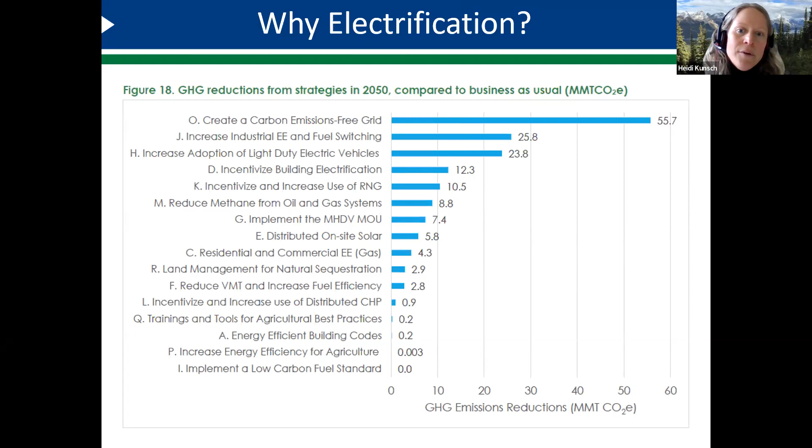So here in Pennsylvania, those rebate programs will not be available until the end of this year, early next year. So we're looking at least another 9 months till this is available. But just wanted to mention that as it's an FAQ right now. Next slide.

Kitchens are a table that we can all gather around: our mutual love of food, and also our passion for the environment and public health. These are all benefits, reducing environmental impacts, public health benefits of induction cooking. So Chef Galarza is going to share with you about those many benefits today. Next slide.

So CHECK is an education and a rebate program. It's two components, and it is a pilot. We are trying to see what the interest is in kitchen electrification in Pennsylvania. So it's just a demonstration program. We may enter into a year or two, but we're just trying to gauge the interest out there.

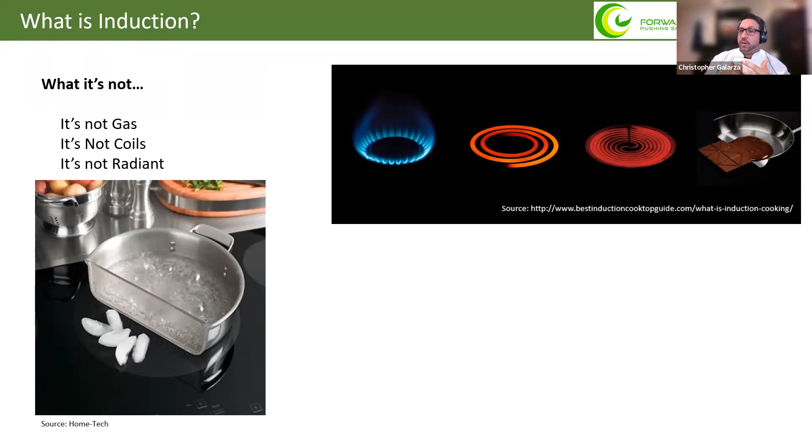Induction is actually a safer way of cooking. It's a way of cooking using electromagnetic currents to heat your cooking vessel. As you can see, as an example, the pot of water is boiling, but the ice cubes aren't melting. The chocolate here is melting, but the chocolate outside of the pan is not.

So it's an easy way of meeting your sustainability goals, as well as saving yourself some money, which we can go into later. So the way it works is we take this tightly wound copper coil and we send electrical current through it. And as it's going around and around in circles, it's creating what's called an eddy field, which is an electromagnetic field that oscillates the ferromagnetic molecules in the pan, making the pan itself the heating element. That molecular friction that's happening while those molecules are jumping around is what heats up the pan.

The easiest way to imagine this is think about your microwave at home. When you turn it on, it sends these little waves that excite the water molecules. And as those water molecules are jumping around, it creates the friction that heats up the food from the inside out. So the difference with how electric resistive works is that we have to take in this electrical current, convert that current into heat energy by resisting that current, and then that heat energy makes it to the pan. Once the pan is hot, then the food gets hot. This is a way of bypassing all that and going, to use a car metaphor, power directly to the wheels.

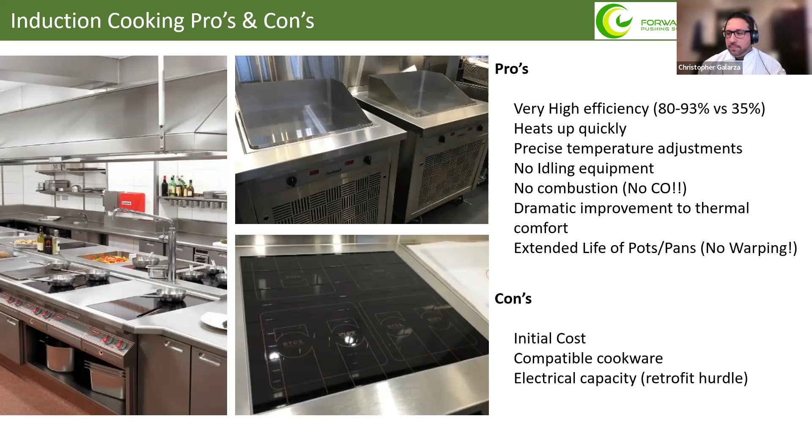But what other solutions exist, right? Electric combi ovens exist, induction griddles, hot water heaters, fryers, broilers, tilt skillets, steamers, ranges, woks. You name it.

There's nothing in a gas kitchen that doesn't already exist in their electric counterparts, including these traditional ways of cooking, like tandoori ovens and wok, and an induction wok. In fact, when you cook with a standalone wok, if you have the induction version, you are actually saving about 500,000 gallons of water per year per wok. I've seen estimates as high as 750,000 to 1 million, but conservatively about 500,000 gallons of water per year per wok is what you'll be saving.

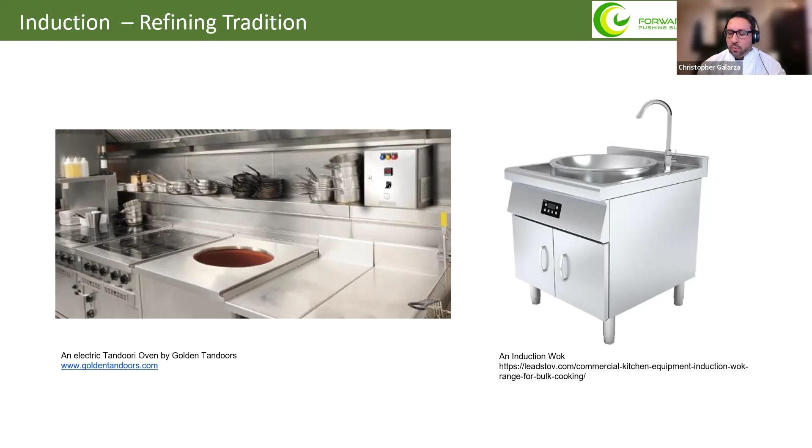That's a significant amount of water, especially if you're over on the West Coast, which I see some of our attendees are. Water is increasingly scarce over there on the West Coast, so it's important that we are conserving what we have. And this is a way of allowing us to still continue with our traditional ways of cooking while also being good stewards to the planet. It's a way of doing both, walking and chewing gum at the same time, if you will.

Now, what are the operational differences between this gas range and the induction range? I said before that the gas range is probably at most around 35% efficient. Truth be told, in the field it's somewhere in the high teens, low 20s. The way that they get the efficiency rating is by rigorous lab testing. And let's be honest, chefs are not scientists.

Oftentimes, for us to turn things out faster, we'll have all the burners on with stacks of pans on top of them, so we can quickly get these pans going, get them hot, and get the tickets out. It's not uncommon in the middle of a rush to have a stack of saute pans with one burner on high, so that way your pans are already hot and going, and you can just keep replacing those pans. That just goes to show how inefficient this equipment is.

But let's throw that away. Let's imagine that this piece of equipment is actually a 50% efficient range. It does not exist, but we're going to say it does for this argument. How does it stack up with the induction? So the 50% efficient range can cook 38.6 pounds of food per hour. It's going to need some time and elbow grease to clean, which all the while can cause burns and fires. If you haven't cleaned one of these, let me walk you through it.

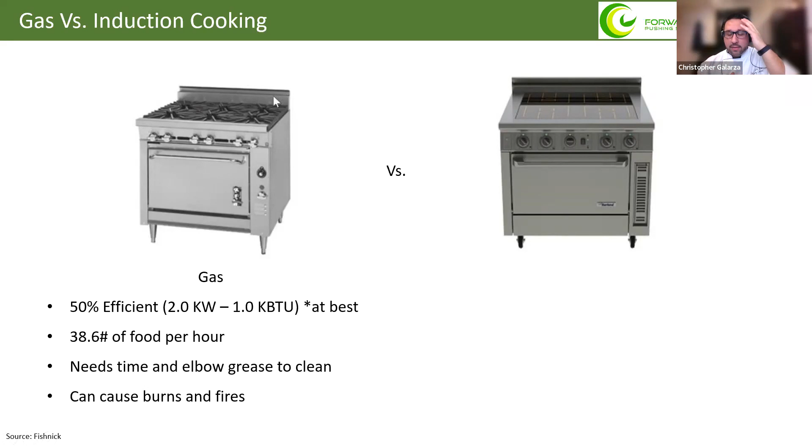We will take these grates off after we scrub them down and put them in a sink with some degreaser and hot water. We'll then take the burners off, put a toothpick through every single hole to make sure that they're properly cleaned out, and then put them as well into that sink with the degreaser and hot water. Then we'll scrub down that whole unit, dry that off, pull the drip tray, which is located underneath these little knobs, pour the contents out, take the foil off, scrub that thing clean, dry it off, put new foil back on it, put the drip tray back in.

Then we'll go back and scrub and dry the grates and the burners that were in the degreaser. We'll put that back together, and then we'll light the pilot lights. All that, if you do it right, probably 20+ minutes. If you go over to the induction, 90+% efficiency, as we talked about, which amounts to 70.9 pounds of food per hour, nearly doubling the throughput that you would have with your gas kitchens.

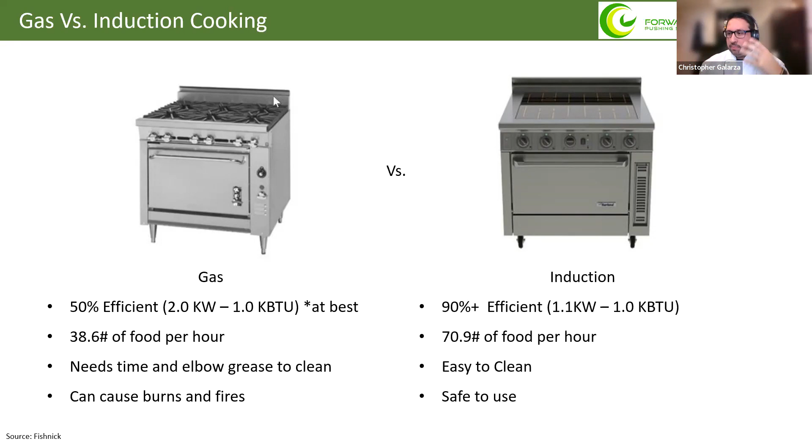It's a lot easier to clean because there's no thermal sources of heat. Even if you spill cream during service or whatnot, hot soapy water will clean that thing. If you spend 90 seconds on it, you're probably taking too long. It's very quick and easy to clean, a lot safer to use, which means that not only are you nearly doubling the production that you can do, but you're also spending significantly less money on harmful degreasers and chemicals to clean, and less time on labor to clean your kitchen, which of course is a huge savings as well.

Your wok, this is a traditional gas wok. This is about 100,000 BTUs at 19% efficiency. You can cook about 124 pounds of food per hour. This is a plug-in countertop hob, significantly smaller in size, which means you can be a lot more versatile with it. You can cook nearly the same amount at 117 pounds of food per hour. But what are the comparisons between BTU and kilowatts? And what if you had the comparable size?

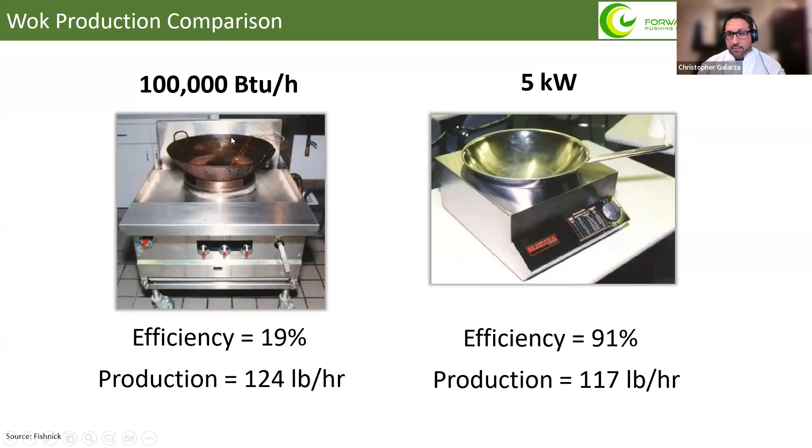Well, the 30,000 BTU range that I just showed you at 35% efficiency gets you about 10,000 BTUs to the food. The 5 kilowatt hob at 85% efficiency, lower than what I just showed you, got you 14,000 BTUs to the food, which is why we're able to cook more food quickly, because we're getting more energy into the food a lot faster. The wok at 20,000 BTUs to the food.

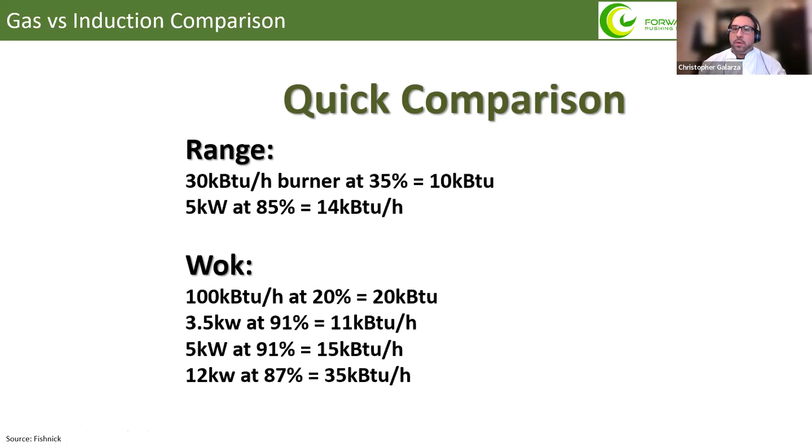If you look at the countertop one, it got you 15,000, which is why it was so close. But the standalone one that I showed you earlier got you 35,000 BTUs to the food, nearly doubling the amount of power you get into that wok, into that food, which is why we can increase production so much faster.

So, cost comparisons. What's this going to cost to run? Well, if you're going to operate your kitchen, here are some assumptions: 360 days per year for 15 hours a day, and you're paying $1 per therm, which means $1 per 100,000 BTUs coming into your kitchen, or 17 cents per kilowatt hour. You're going to be paying $1,123 a year to run your gas range, and $1,114 a year to run your electric range.

Now, that's not to say, hey, go induction, we're going to save you $9 a year. It's to say that the cost of operation is roughly the same. So with this example here, we're a little bit deceiving, because the cost of gas has actually almost doubled last year, and in fact in California has doubled again this past month.

And the cost of electricity is actually nationally right around 14, 15 cents per kilowatt hour. So these numbers are actually wrong. It's actually cheaper to run your induction by a lot than it is your gas. And it's only going to get cheaper, because we saw reports last year that said about 65% of the gas infrastructure is leaking methane, and it's going to be very costly to fix.

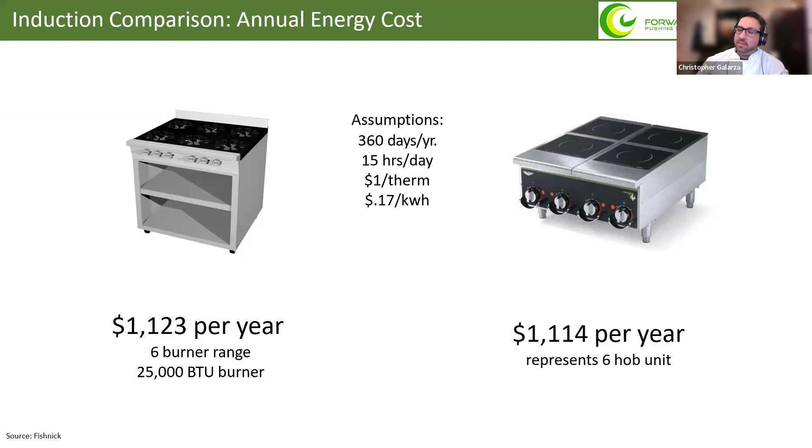And like most businesses, when you incur a cost, you pass that on to your consumers. So this is a huge cost. It's going to be passed on to consumers, which is why you're seeing gas prices steadily rise. And we're expecting to see another near double increase nationally by the end of this year. So it's only going to continue to go up. And as the grid gets cleaner and more efficient, costs will eventually go down.

So thermal comfort, how does this stack up for chefs? The way we quantify thermal comfort is by breaking it down into 3 pillars. One is things that we can't control, like Mother Nature: what's the air velocity and the humidity? What's the operative temperature, or what the building owner can control: the air temperature, the radiant temperature of the building. And what's the occupant behavior, what you as an individual can control: the clothing you're wearing, the activity level. All of that contributes to thermal comfort.

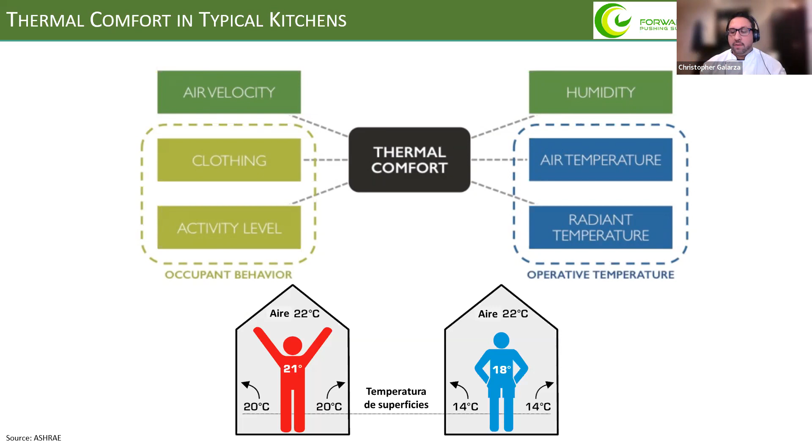Now, ASHRAE did a study that tested over 100 kitchens for a week in all climate zones, and they compared summer and winter conditions. They defined thermal comfort as between 68 and 82 degrees Fahrenheit, depending on the humidity. And the only time a kitchen was comfortable was if they were prepping or cleaning, or if it was freezing outside. The truth is that most kitchens were far outside that window, some well beyond 100. And I have worked in kitchens even beyond that, where we experienced up to 130 degrees plus.

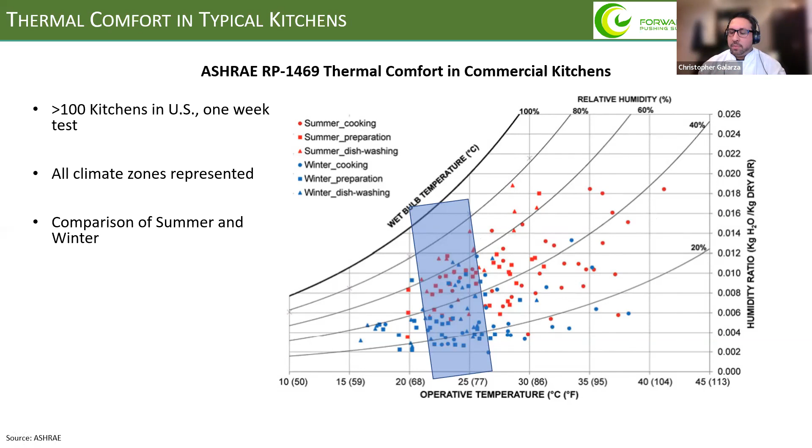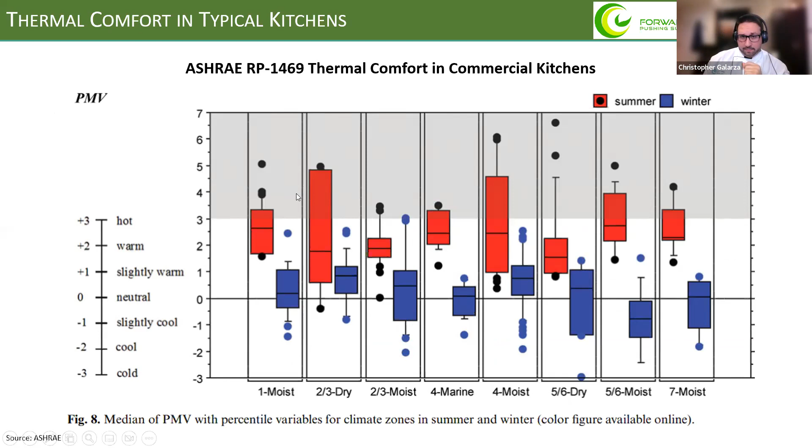When they put it together on a graph and expected this to be the top end, you see kitchens blew that out of the water. They were actually a little bit shocked at the results. But what are the quality of life differences for chefs, for the person that's in the space? Well, this is what you would traditionally see: big flames everywhere, chefs running around.

In fact, at any given moment we are running at full speed with sharp objects and things that can burn us, all for the sake of feeding our guests. And in these spaces, we are trying to turn around tickets in 10 minutes or so, and we're feeding hundreds of people per hour, and it's a very stressful environment. And when you're working in these conditions, you're running that fast, you're pushing yourself as hard as you can, and the kitchen is far beyond 100 degrees Fahrenheit.

In fact, there was one time I looked down at my thermometer in my chef coat, and I saw that it was well over 130, 135 actually. And what that does to your body is just like a marathon runner, you will get sick after a while. And if anyone's been through conditioning training, you know that after a while, your body will just throw up. You will get sick. And what we saw was after a rush, we'd be clamoring to go to the bathroom to kind of do that. So that's what we're putting ourselves through.

And there's been times where if I've drank too much water, my electrolyte balance has been thrown off, and then my muscles get all tense. And I remember getting sent home actually because I was on the verge of having to get an ambulance called because the electrolyte balance was so off. So it's a very inhospitable environment, if you will, for the hospitality workers.

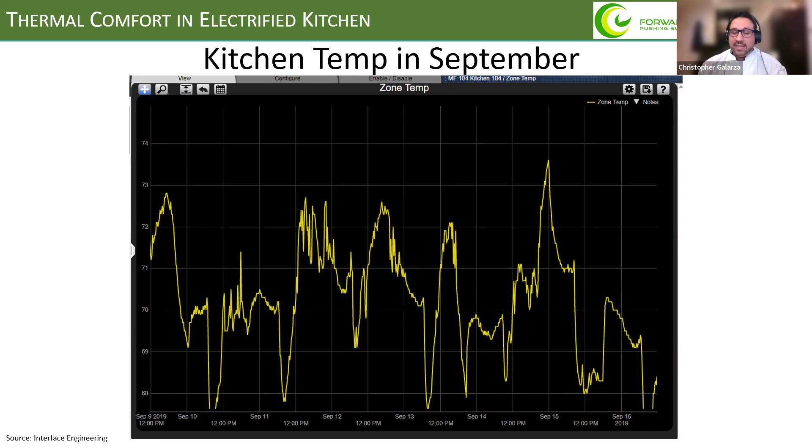So it was actually cooler in my kitchen during production, next to my ovens, during service that entire week than it was outside in the perfect summer week. So we went from about 130 to about 70. So it's a 60-degree drop. That's an insane amount. The difference is just, like I said, night and day.

And what are the health considerations with combusting fuels in the space? Well, when you burn natural gas, you release things like carbon dioxide, nitrous oxide, sulfur dioxide, formaldehyde, particulates like soot and smoke and other PM 2.5, and also carbon monoxide. Now, we're going to focus on carbon monoxide because we have sensors in our homes and at work because we understand the dangers of carbon monoxide.

So what is carbon monoxide? Carbon monoxide is an odorless and colorless toxin, and typical outdoor concentrations are anywhere from 0.03 to 2.5 parts per million. Now, there are no indoor air quality standards in America currently, but the federal standards dictate that it cannot exceed 9 parts per million outdoors. So if it exceeds 9 parts per million, that's when the government comes in, everyone goes inside until they find the source of the contamination and they fix it.

The problem is when you're cooking indoors and you're combusting fuels indoors, it can far exceed 200 parts per million, symptoms of which are nausea, vomiting, headache, lightheadedness. Does it ring a bell from what I just talked about while I was a chef in one of those gas combusting kitchens? Complications of which are permanent brain damage, cardiac damage, and even death.

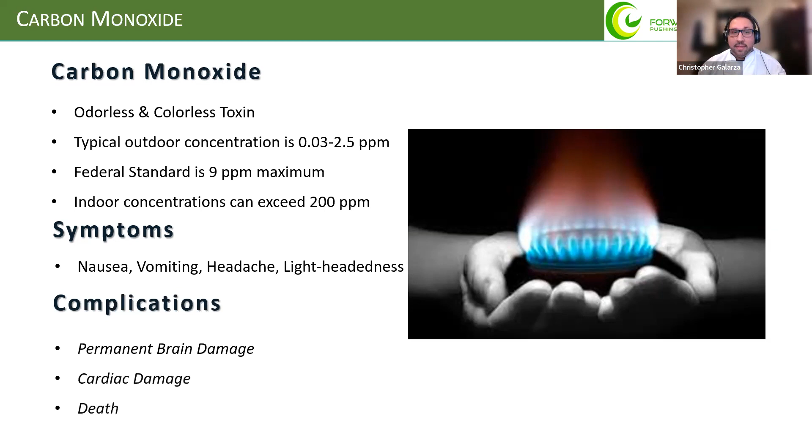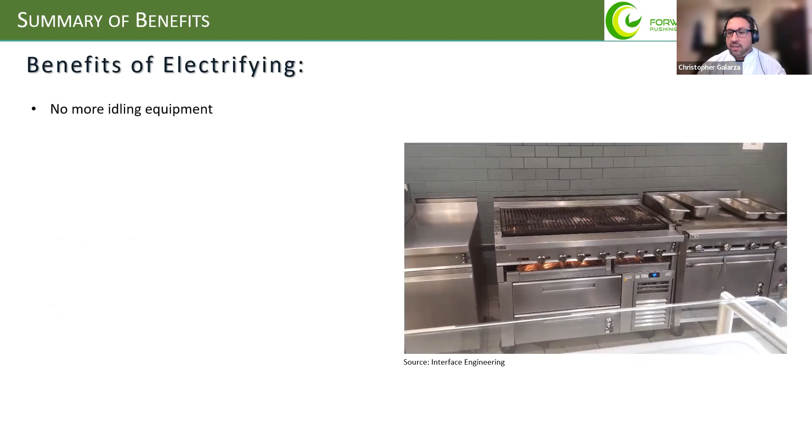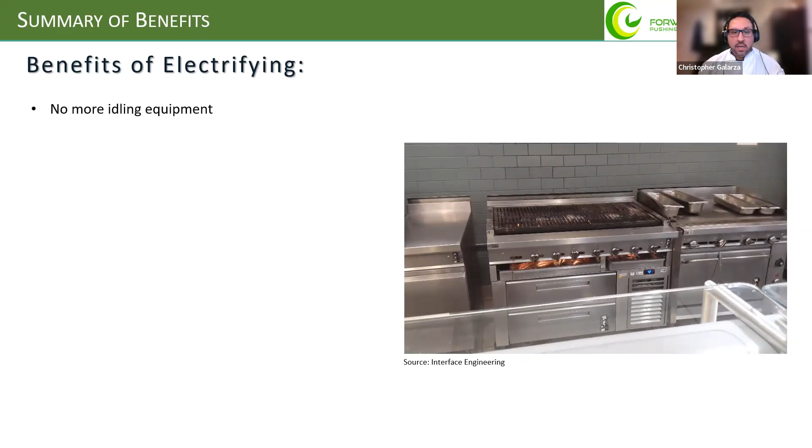Benefits of electrifying are a lot. Let's just recap here. First off, no more idling equipment, as we can see. This was taken by a colleague of mine over at Stanford University, where service is done. They were just breaking down, and the grill was still on because it has to be on to get that metal hot. And if anyone shows up later wanting a burger, then you need to cook it, because it takes so long for fire to get metal hot. It's just a cost of doing business, but you don't have to do that with induction. It reduces building emissions, which reduces environmental impact.

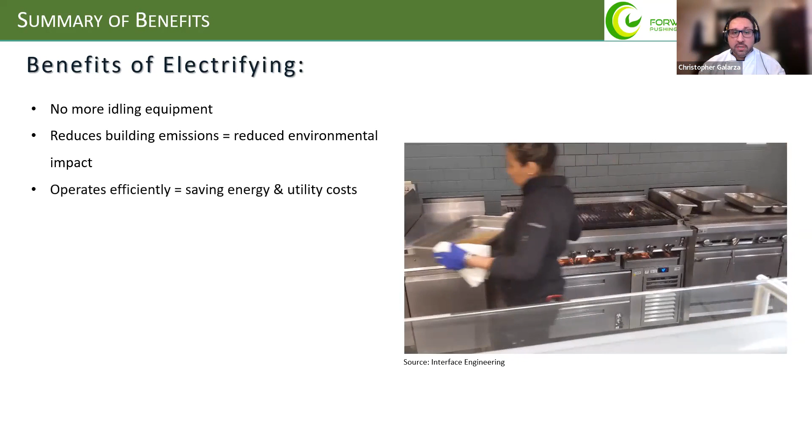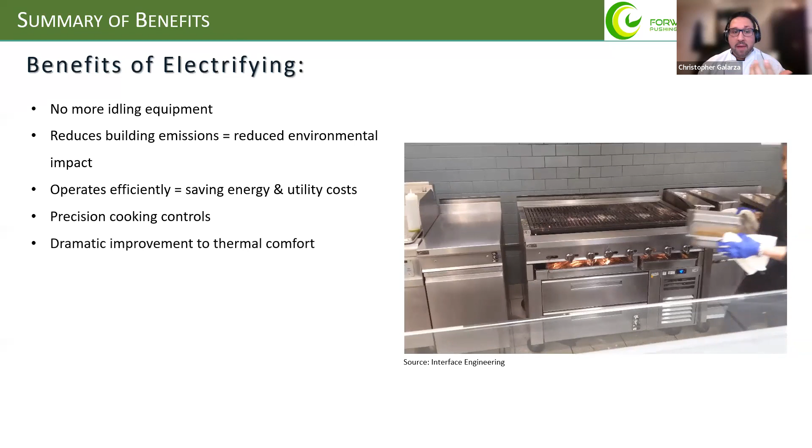Your operation is more efficient, which means you're going to save money on your energy and utility cost. Precision cooking controls, which means more consistency with your cook. There's a dramatic improvement in thermal comfort. They're going to extend the life of your pots and pans. It's easier to clean, which means you're going to save on chemical costs as well.

It's faster throughput, increased productivity, which means there's an increased dollar per labor hour. In other words, the dollar that you're spending on labor hour, you're getting more back than you would in the traditional kitchen. Thermal comfort, which we just talked about, and the improved indoor air quality, which is a big one.

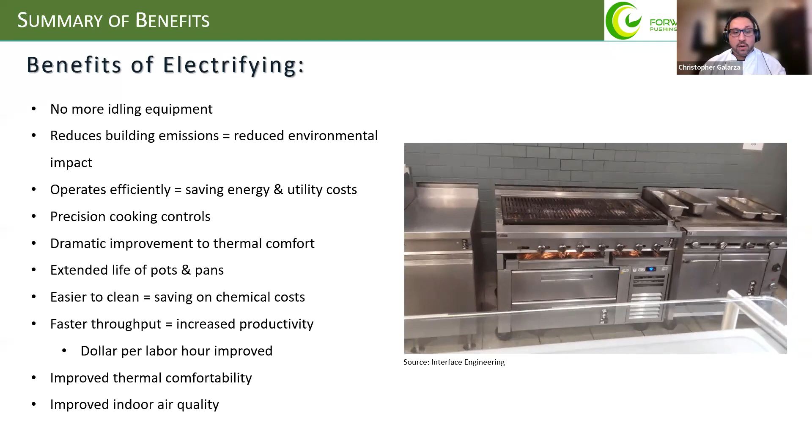So home stretch here, myth busting. Now we're going to tackle some of these pervasive myths that I've heard pretty consistently in my career. The first is that you can't create quality food on induction, which is simply not true because the Fat Duck, one of the best restaurants in the world, led by Heston Blumenthal, cooks on induction. Noma, #1 restaurant in the world on the planet. So the best restaurant to exist that year, all electric.

In fact, the Culinary Olympics and the Bocuse d'Or are actually all electric as well, which means that the international community decided that induction cooking is the standard by which the best chefs on the planet will be judged. And they cook on the highest level of cooking year over year. So that's a myth busted, right?

Sauteing isn't possible on induction. And his thought is that once you lift the pan, it's no longer connected to the induction range. Therefore, how can it possibly stay hot? And the simple answer to that is once you lift the pan off the gas range, the fire isn't following the pan. How's the metal hot? Metal is just hot. That's just how things work. So it absolutely is possible on induction.

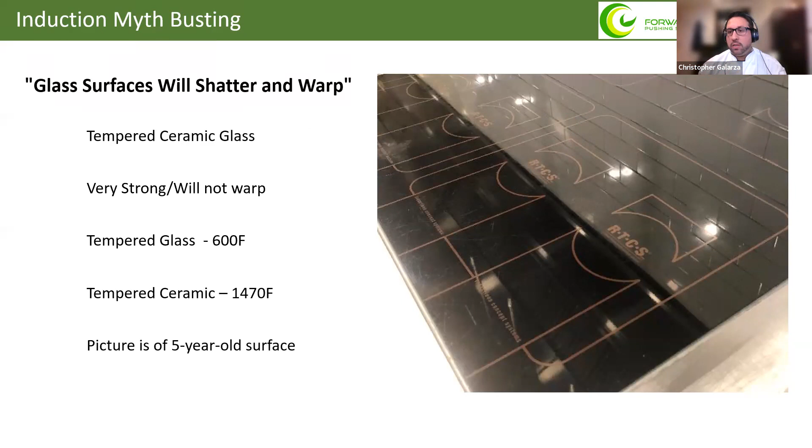It's not glass, it's tempered ceramic glass, which means it's very strong and it will not warp. The difference is tempered glass can withstand temperatures of up to 600 degrees Fahrenheit. Tempered ceramic glass can withstand temperatures well beyond 1400 degrees Fahrenheit, which we all know none of our ovens can get that high. And that picture is of an actual 5-year-old surface, which you can see there's barely a scratch on it, and it's so clean you can see how clean my walls are from the reflection.